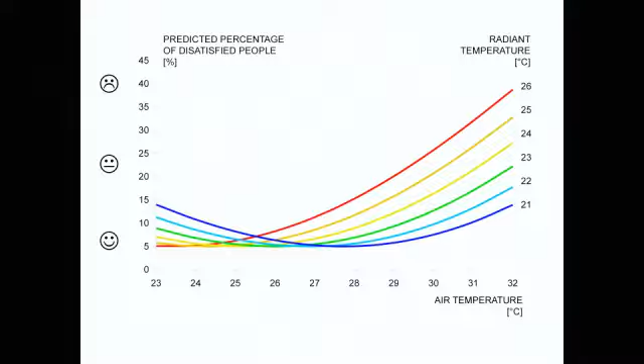So in a building, let's assume a poor building in a hot environment, typically the walls would be warm, not at this building. Ceiling would be warm, the shading, probably the window would be warm. And to compensate for that warm, radiant environment, we would need cold air. That's a typical American way of air conditioning. You need cold air to compensate for warm walls.

But what if you turn it around? Just imagine if we would build a better building, we would improve the building envelope, and we make a building envelope which is better in the way that it doesn't heat up the room, then we could use an air temperature which is much higher. We would create, and you see it's the same percentage of dissatisfied, or in other words, the same percentage of happy people by using warm air because we control and we have a better building.

So from Transsolar, from our point of view, that's key, understanding that and using that. And that's probably the background we have been using in most of our projects. Besides daylight comfort, besides fresh air comfort, besides acoustical comfort, integrating radiant comfort into our technologies is the central comfort idea, I think, in all the buildings we have been involved in, and that's just some of them.

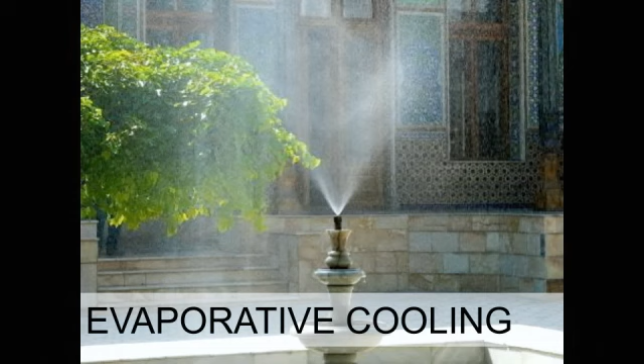Or evaporative cooling. I was traveling in Asia because of projects we did, and I was always curious that I saw people using evaporative cooling technologies, spraying water in a warm and humid environment. That doesn't make sense if you use the comfort equations we use for indoors. So I became curious with my team to think about, can we explain that? And if we can explain that, can we use that to create comfort?

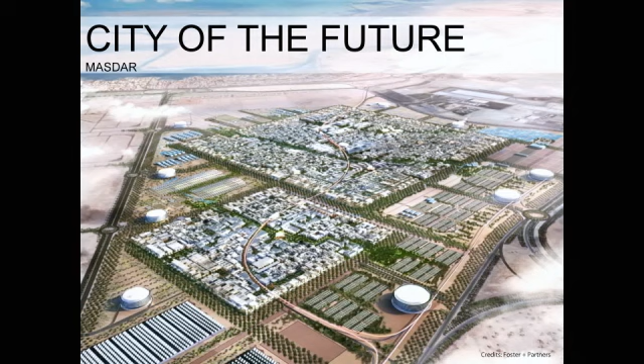And the last thing is sky cooling. Obvious and interesting cooling and the most efficient cooling source in the desert. So one of the biggest projects we have had the luck and the chance to work on is the Masdar project. Masdar calls itself the city of the future. Hopefully of our future.

It's a city close to Abu Dhabi, and it's a city where in the climate of the Gulf region, which is mild in winter, but warm, humid, and extremely sunny in the summer, the client wanted to build a city with excellent indoor air quality and excellent fresh air quality, providing excellent living and working conditions, on the basis of a zero carbon footprint design. And obviously, to think about a zero carbon footprint, not using any more fossils, using renewable energies, you need to question our way of living and think about a new way and a new style to live.

And that has been a project of our team with Matthias, working with Foster + Partners on the master plan. And I had the chance to work with Lava architects, and Tobias gave a beautiful talk about that last year at the TED conference on the central plaza, the central plaza of the city.

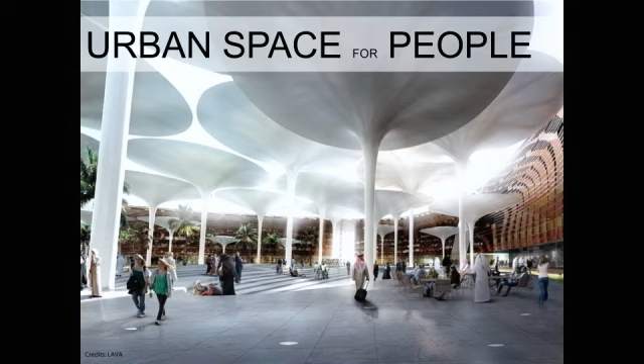So imagine a city without people. That doesn't work. So we have been thinking we need to create a place inside the city which is so comfortable that people enjoy going to that central place in summer, instead of meeting in a chilled and cooled shopping mall. We wanted to create a place in the center of the city which is so comfortable that people go there. And by no surprise, a good strategy in that climate for summer is shading.

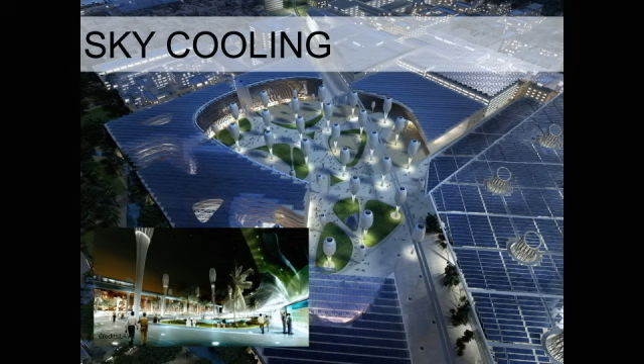And you see umbrellas, which we have been using for the shading. But very important is to take advantage of the sky cooling, so to release heat to the sky during the night. So that's why we developed that idea of umbrellas which open during the day to shade the plaza, and which close during the night so that the heat can be released to the sky. Here you see an image of how that shading pattern looks with the closed and with the opened umbrellas.

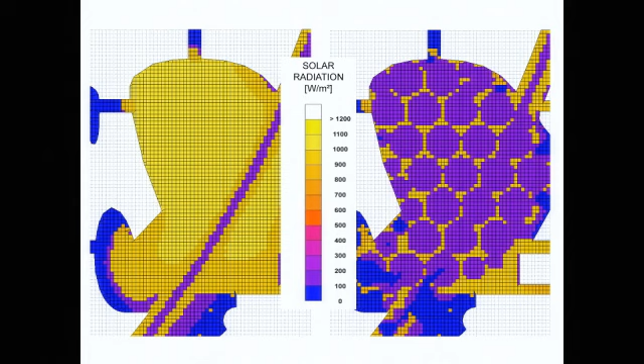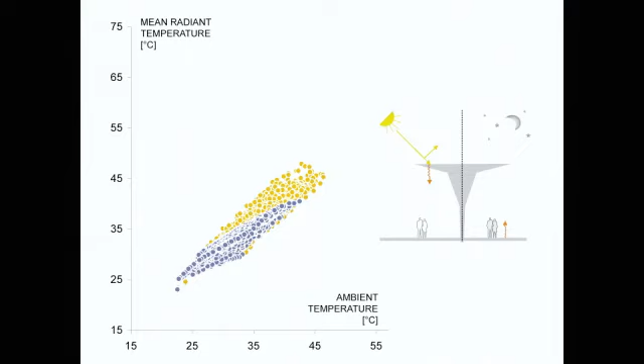But what is important, don't get confused. Just follow the two colored clouds. If you are not in a shaded environment, you have radiant temperatures up to 70 degrees. That's just super uncomfortable. That's extremely hot. People don't enjoy that. But if you have better shading during day and during night, you drop down radiant temperature during day. That's good. But you lift radiant temperature during night. And you do really good if you have both shading during day, open during the night.

But what you see, it's probably the best you can do by passive design. It's still not that comfortable, what we wanted to deliver to the people. So we wanted to do better. We wanted to increase the part of the day in the morning and in the afternoon when people can enjoy that plaza. So there is a demand for cooling, for an air conditioning system.

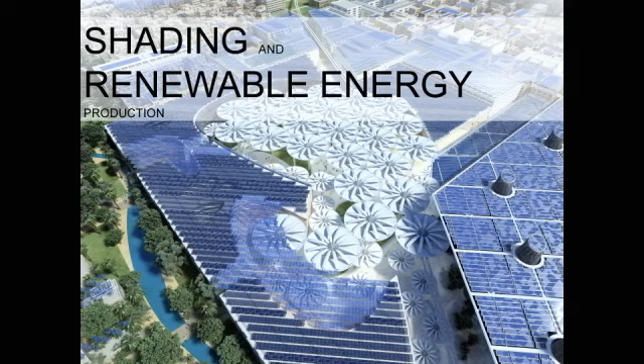And the idea is, if you do that, you need energy. Use the energy you can harvest on your footprint. Use the energy which is available on your footprint. Don't borrow energy from your neighbor or from history, so from fossil. Use the energy you can harvest on your site, and that's why these umbrellas are covered with a photovoltaic system so that they can harvest solar energy during the daytime, which is then used to create comfort.

And not the kind of comfort we have in the chilled and cooled shopping malls. No, it's the kind of comfort which is making that plaza better so that people like to go there, that people meet there, go with the kids, play, talk to your friends, and probably make a revolution. You need a place to make a revolution.

I want to show you another example, another project we've been working on, which is the solar cooling project of the Qatar football bid 2022. We received a call, and the call was about, do you like to join us? Do you like to join the team of Albert Speer and Partner and Pro Project to make comfort in open stadiums? Wow, what a question. We're a green company, so why should we waste energy for cooling open stadiums?

But there is opportunity in that. And we had this discussion with our team. There's an opportunity in that. Let's ask the client if he likes to commit himself to use solar energy to do that. And the client committed himself to do that.

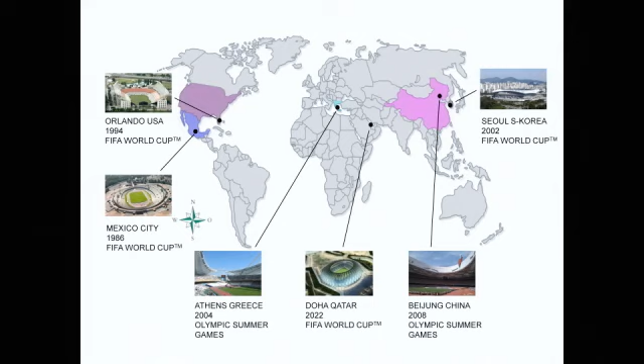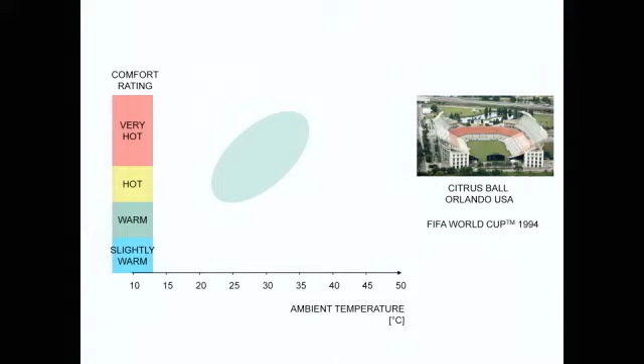And the idea we developed is to create a kind of comfort which should be better than in all these places we have been analyzing, to compare comfort in stadiums, because there's no science, there's no knowledge about it. We know very little about comfort in stadiums. So we said, let's compare that. Let's compare what happens, for instance, in Orlando.

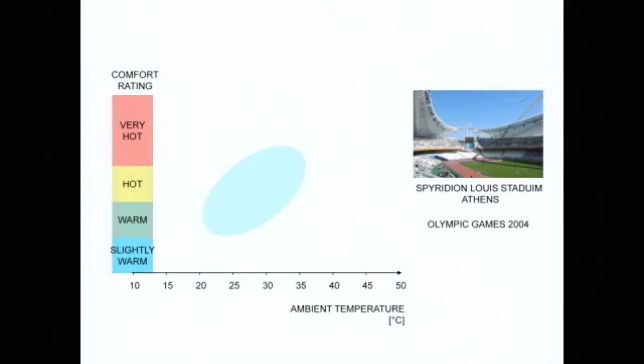You see, it's not too warm air temperature-wise, but it's extremely humid, and people have been sitting in the sun, so that was uncomfortable. That was an uncomfortable place. Athens, people have been sitting in the sun, the same as in Beijing.

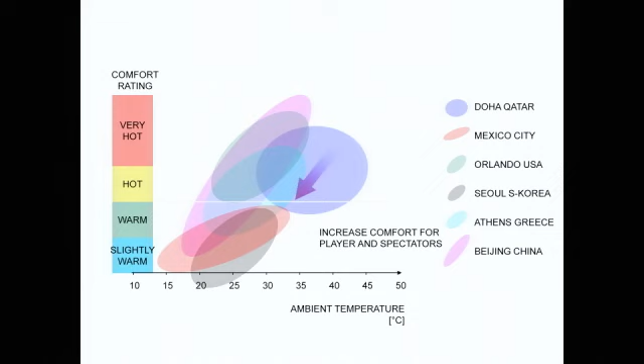So we put and we overlay all the comfort ratings of the different venues of football championships and Olympic Games, and we found that with Qatar, which is the blue circle on the right side, even with the best practice strategies applied, we are not that bad, but we are not that good. So we decided with the team, let's make it better.

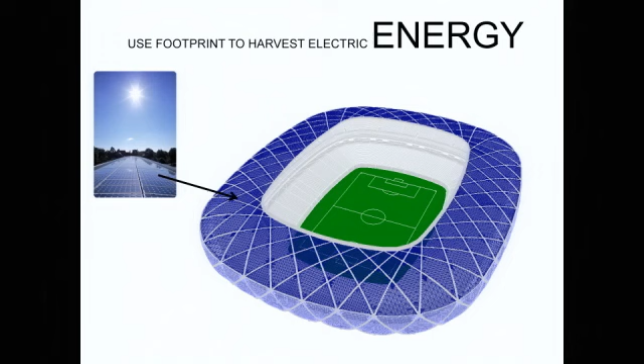Make it better, increase the comfort so that we achieve a comfort which is so great that the football players can show the best performance, can show the best football. The spectators in 2022 will enjoy the games and say, wow, that's good. We enjoyed it, and we found good conditions, and we saw great football. So that was the objective.

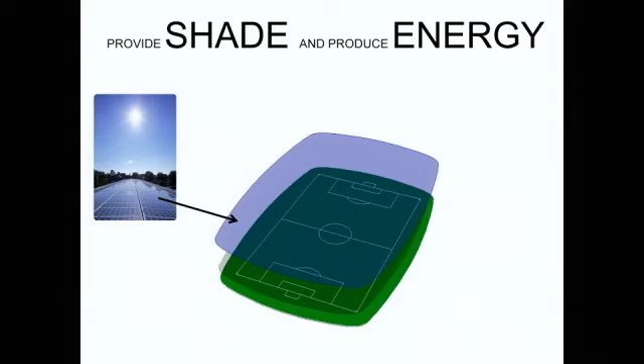And again, the same strategy. Use your footprint, harvest energy, shade the 32 training pitches so that the teams can play and train on the sites, and harvest energy and produce the energy you need to cool and condition the Qatar 2022 World Championship in football.

And the good thing about that is the system will stay in place. And every day the sun will show up. And in 2023, we can deliver as a legacy the energy equivalent of cooling the stadiums back to the grid. And the next year again, and the next year again. So for the next 20 years, every year, we can deliver as a legacy the energy equivalent back to the grid.

That was the idea from our side, climate engineering, for the Qatar 2022 bid. You might think, wow, that's future music, and yeah, you're right. But whatever happens in 2022, we don't know. But let me come back very quickly and show you what we can do at home. And this story is about electric energy, and it's a quick story.

I use electric energy with my family. We are a family of 4, for TV, for radio, for appliances which make our life more comfortable, washing machine, dishwasher, refrigerator, and so on. And we need light. And I have bad eyes, I am using a lot of lights. And if you do that in an energy efficient way, it's something like 2,400 kilowatt hours in my family.

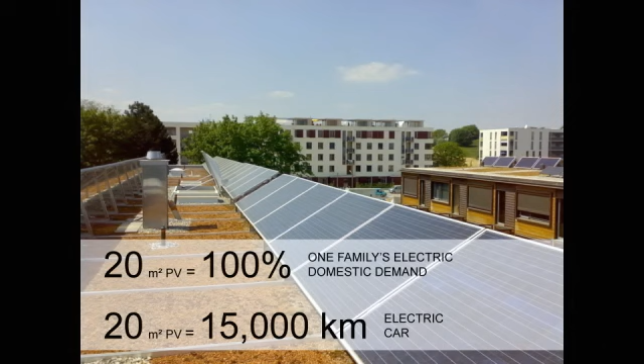I drive with my family in the city of Munich roughly about 12 to 14,000 kilometers per year. And the answer again depends on, is it a big car, is it a small car? So assume a Golf, which is fine for 4 persons. Then the answer is, it's 15,000 kilometers. Amazing. Another 15,000 kilometers which you can drive if you get another panel of 20 square meters.

Isn't that amazing? So next year when you get your electric car, it's 20 square meters which make you independent from gas, and for the next years. And you probably buy 2 electric cars before this system gets out of function. So I think we very often overestimate what we'll do in future, and we underestimate what we can do today.